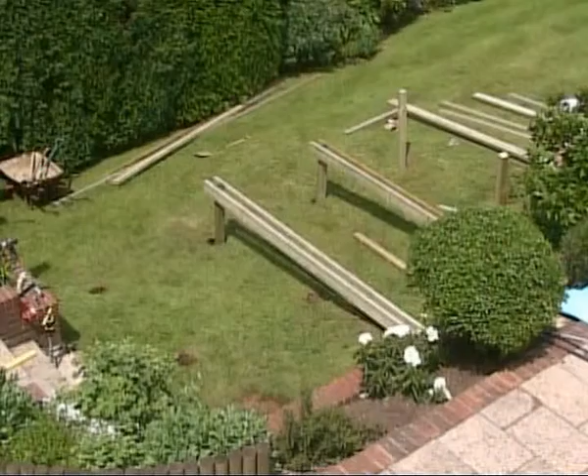This is it, our decking site. A sloping area hardly ever used by my family, but by the end of the week we will have transformed it into a fantastic new recreation facility, a place to relax and have fun. Right, let's get down to business.

Timber decking is as popular as ever for creating a versatile and beautiful extra living space in our homes. Decks provide a space to relax, an area to play, a place for dining outdoors, an extension to our living space. Wood is best. Timber is still our most adaptable and only truly renewable construction material. Properly protected, it provides the perfect long life, low maintenance and economical choice for our decking. Timber also has a natural beauty and warmth, making our deck look and feel attractive.

What is Tanalised E treated timber? Tanalised E treated timber provides us with an economical, versatile and long-lasting material for our decking project. It is pressure pre-treated with the latest generation wood preservative, manufactured and supplied by Arch Timber Protection. This provides total protection against wood decay and insect attack, together with a long and low maintenance service life. It can be used with confidence for both in and out of ground contact applications. And Tanalised E treated timber is used by leading timber companies to manufacture their decking components.

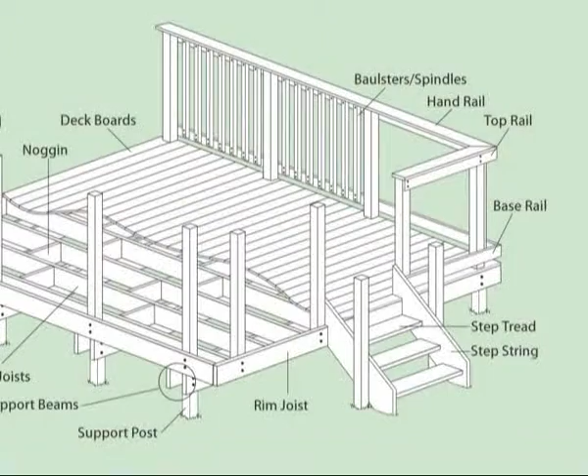Take care not to burn offcuts of treated timber. Do not burn treated timber offcuts in barbecues, cooking stoves or grates. Dispose of them safely as refuse. Wear goggles when pressure washing or scrubbing decking area with cleaners or restorers. During the project, keep children away from the work area until the job has been completed and tools have been safely stored away. A consumer information leaflet for Tanalised treated timber, which covers its general use, is available within the Documents section of this CD. Updated versions are always available from the Arch Timber Protection website, www.archtp.com.

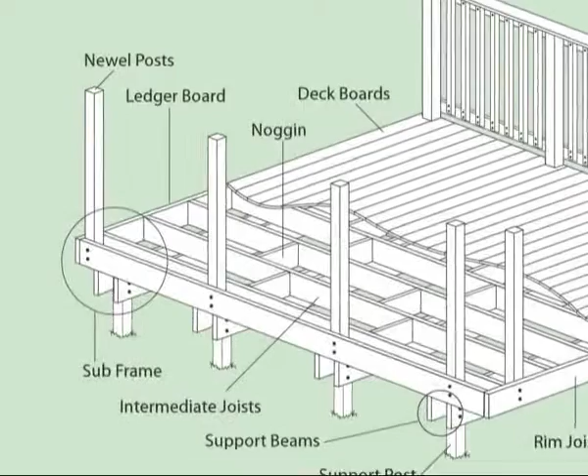This illustration highlights all the components that are used in deck construction and will be referred to in this presentation. Notice that the subframe is made of several components: support posts, support beams, joists, noggins, and Newel posts. One important thing to bear in mind is that the deck boards run in the same direction as the beams and across the joists.

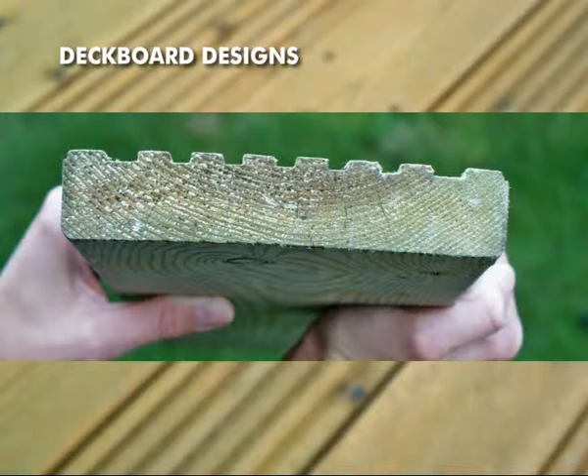Deckboard designs. Different decking suppliers offer varying deckboard designs to give you a wide variety of choice. Some boards have plain, smooth surfaces, and some offer a combination of smooth and profiled surfaces. The width and thickness of deckboards also varies. Generally, the narrower and thinner deckboard designs will require more supporting joists to support the boards within the deck design. Your choice of deckboard design will therefore have an influence on your subframe construction. This will be covered later in this presentation.

Newel posts and balusters. Decking suppliers will also offer a choice of Newel post, handrail and baluster or spindle designs. These can be traditional turned posts, handrails and spindles, or more contemporary straight posts, rails and balusters. Fixing methods for each are slightly different, but the basic principle remains the same. Newel posts and balusters, together with accompanying hand and base rails, form an attractive feature or barrier around your deck.

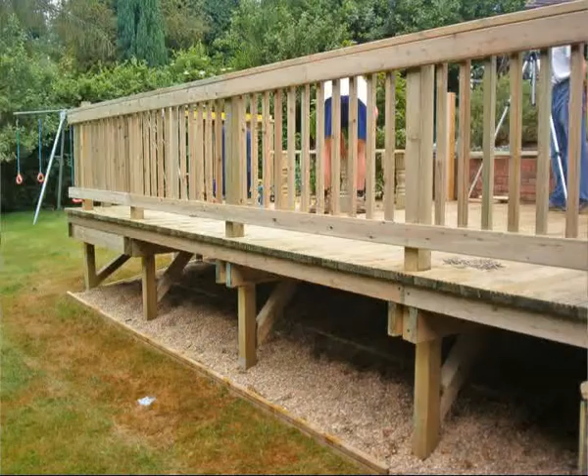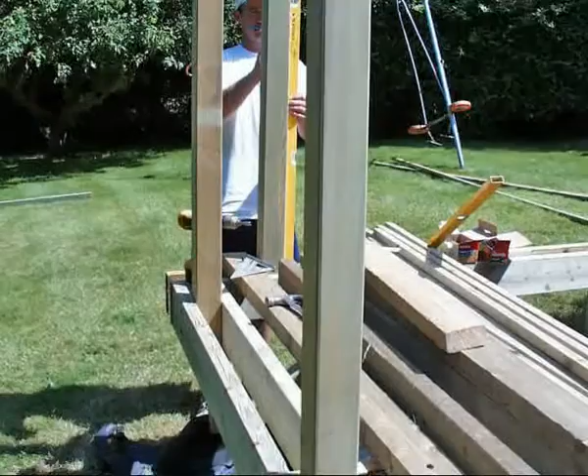Our deck design. Methods of deck construction vary greatly depending upon the components used and the design and size of the deck. For the purpose of this presentation, we will be constructing a double-beamed, single-level subframe on support posts over a sloping site. The deck will also have Newel posts, handrails and balusters, a combination of smooth and profiled deck boards, and will feature steps down into a garden area. Many of the construction methods we show you will be able to use or adapt for your deck design.

There are 6 basic stages to building our deck: planning and designing, preparation work, building the subframe, fitting handrails and balustrading, fitting deck boards, fitting steps. First of all, consult Decking and Lifestyle books or the Timber Decking Association website, www.tda.org.uk. They will provide you with lots of ideas for your deck.

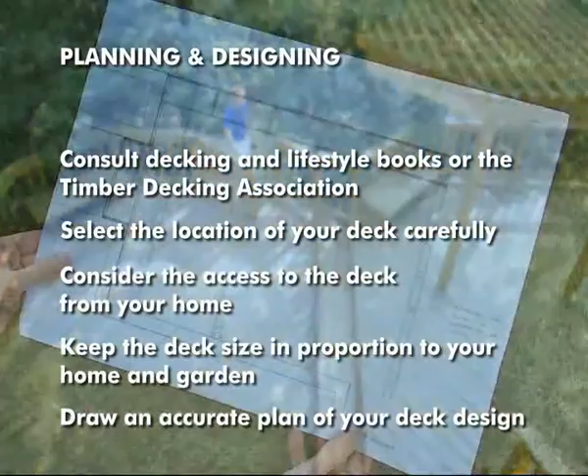Then select the location of your deck carefully, having regard for privacy and the weather, sun, shade, and the direction of the wind. Consider the access to the deck from your home, including safe and easy access for the disabled and for children. It is advisable to keep the deck size in proportion to your home and garden. Draw an accurate plan of your deck design. This will help in the construction process and will help you and your decking supplier to confirm the component quantities you will require.

Remember, if you are constructing your own deck, you will need good basic DIY skills to achieve the desired quality of construction, appearance and performance. For all but a simple low-level deck, you should satisfy yourself as to whether planning and building regulations apply. If unsure, always discuss your intentions with your local authority planning office, as well as your neighbours.

Consider the end use of your deck. You may need to beef up the design and build to commercial specifications for large groups of people, or if a hot tub is being designed into the deck. And be aware that building regulations require that any deck of more than 600 mm above ground level shall incorporate Newel posts, handrails and balusters for safety purposes.

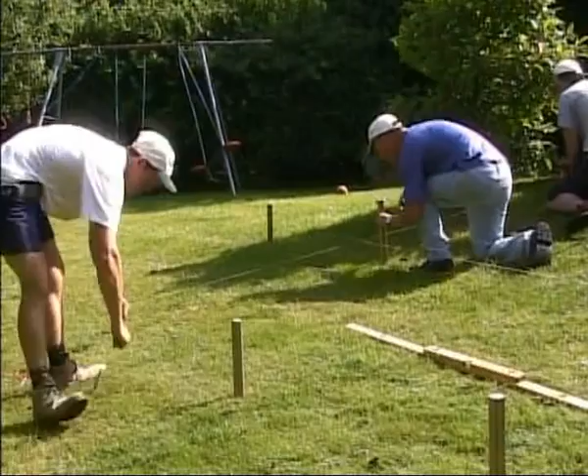Preparation work. Within the deck we are constructing, we will be utilising a low garden wall and steps from the patio area. We will also be incorporating an existing magnolia shrub as part of the deck design. Including features such as these helps to blend the finished deck into your existing garden environment. Once your design and planning work has been completed, using the deck plans, roughly work out your deck area and mark the site with timber stakes and string. This will confirm the size and position of the finished structure. It will also help confirm its scale to your home and garden and its relationship to other garden features.

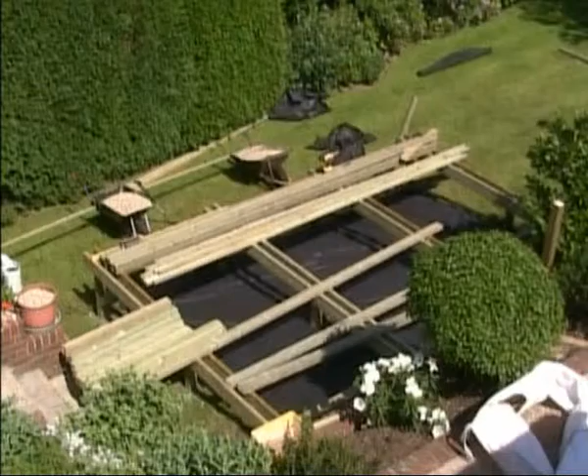Generally, the vegetation covering the site should be cleared. However, turf can be left in position so long as you're applying a weed membrane to the full site and covering the membrane with pea shingle. The pea shingle will cut out any light to the membrane and maintain its function. Rolls of membrane are available from your decking supplier. Pea shingle is available from your decking supplier or your local builder's merchant. On our decking project, because we are using support posts for the subframe, our membrane will be laid over the turf after the construction of the subframe.

Using a measure, accurately determine the position of the deck support posts from your deck plan. These posts will support a pair of beams, which will form the main structure of the deck subframe. Mark their positions using a timber stake. On our deck, we will be using 90mm by 90mm size posts. Check that the positions of the support posts are accurate and square to each other, and to other structures that will be surrounding the deck.

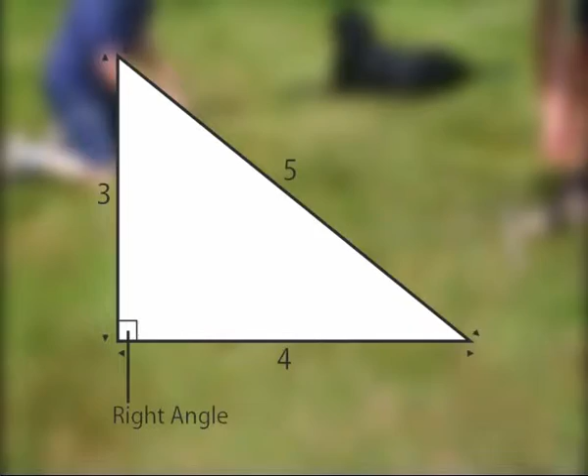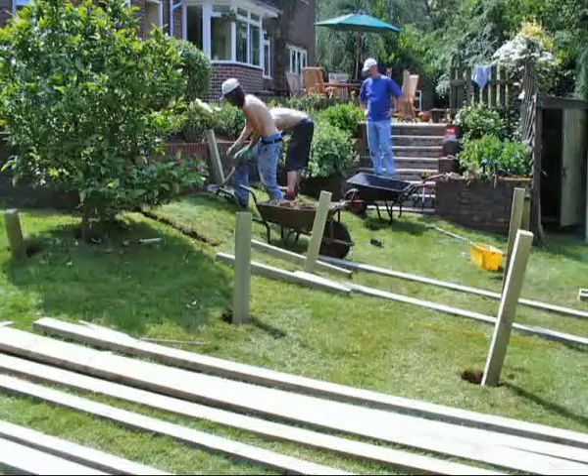A simple way of ensuring right angles between these post positions is to use the 3-4-5 triangulation ratio method, using timber stakes and string. Once you have accurately located the position of the support posts, use a narrow spade to dig a 600mm deep hole at each position. Each hole should be roughly 200mm across. Line the base of each hole with a 25mm layer of pea shingle. This will allow a firm, well-drained base for each support post.

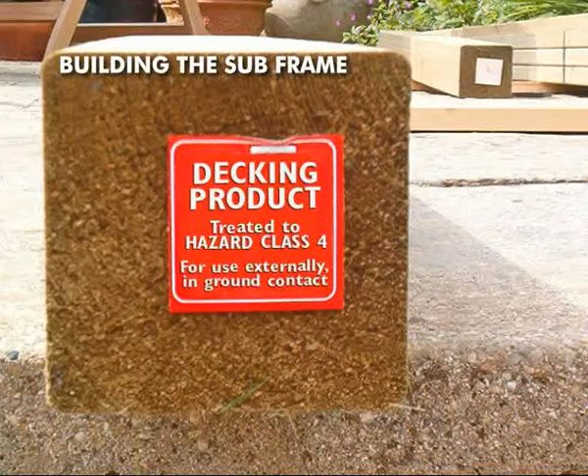Building the subframe. Support posts are different to ordinary Newel posts in that they must have been preservative pre-treated to a higher level of protection to allow for the post being used in ground contact. This is very important for the long-term performance of your deck, and you should check this fact with your decking supplier, making sure that any other ground contact timbers also have this level of protection.

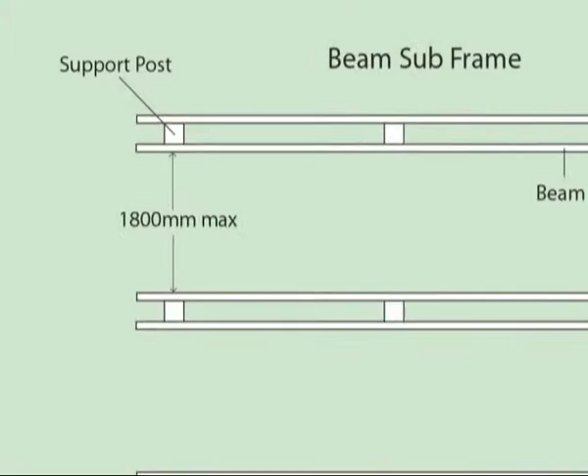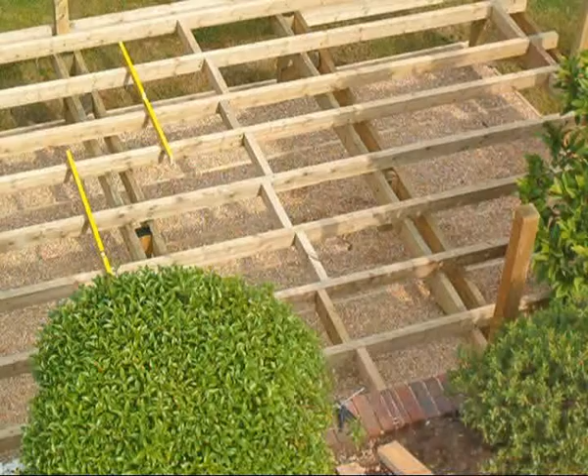On our deck design, there will be 4 beams. The distance between beams should be a maximum of 1800mm. However, depending upon the intended use of your deck, these beam distances may need to be significantly less to provide extra strength and stability. The position of the beams will be determined by the joist size, which in turn is determined by the unsupported distance they have to span.

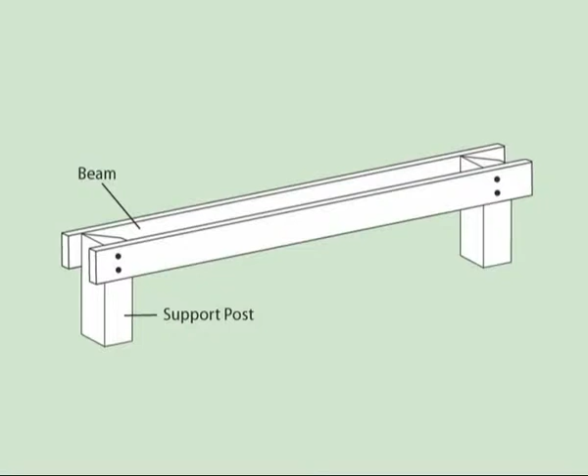Your decking supplier should be able to advise you here, or you can refer to the leaflet showing beam and joist span tables within the Documents section of this CD. Our beams are constructed using 150 by 47mm joists, fastened to either side of the support posts. We now need to cut the support posts to the required size.

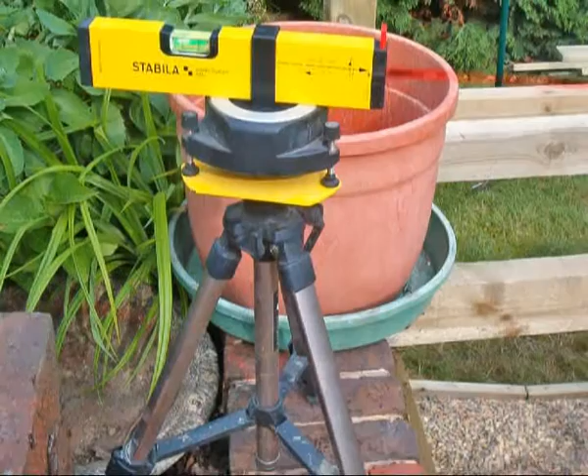If you have a level site, all your support posts will be of a similar length. Because we have a sloping site, the length of each post has to be determined. A useful tool for achieving a general measurement is a laser spirit level. From a fixed point on your deck site, a laser beam can be projected onto each support post held in position within its hole. The point can be marked and each post cut.

Alternatively, each support post can be concreted into position and then cut to size prior to attaching the beams. Here, the 3-4-5 triangulation method of creating a 90-degree angle will help ensure your post positions are square and accurate. When cutting the top of each support post, cut at a slight angle. This will allow rainwater to drain off the posts.

Use Ensele Brush-On End Grain Preservative to seal the cut made to the timber. It is best practice for the opposite end of the post, which will be in ground contact, to be left uncut. If it has been cut, this too should be brushed with Ensele.

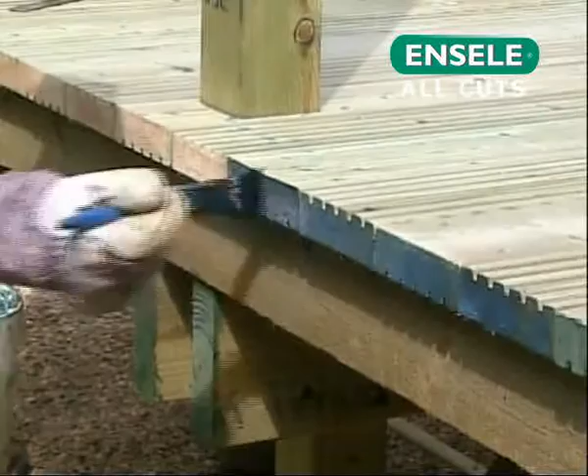Throughout your decking project, all cuts and notches made to the treated timber should be sealed with Ensele, available from your decking supplier. The use of Ensele forms part of the performance warranty of Tanalised treated timber. Therefore, it's very important to carry out this procedure. When applying Ensele end grain preservative, always follow the instructions on the can.

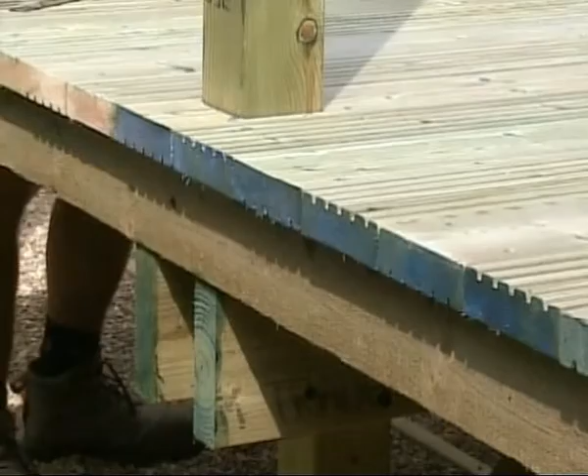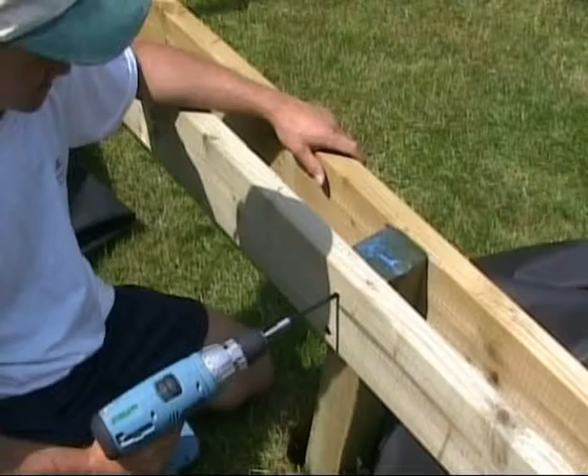The initial blue coloration of Ensele will quickly change after application to a pale green to blend in with the treated timber. A leaflet on the use of Ensele is also available within the Documents section of this CD. To construct our beams, we used 150 by 47mm joists, fastened to either side of your outer support posts. This fixing should be temporary at this stage and made with screws.

Position the beams, with the outer support posts attached, into the holes and check the beams are roughly level to each other using a long spirit level. Height adjustments can be made by either hammering down the support posts to drop the level or adding extra pea shingle under the posts to raise the level.

When constructing the deck, you should allow a slight fall in one direction, usually from back to front or to the side. This should be a minimum of 1 in 100, allowing adequate rainwater drainage on the finished deck. If you are using grooved deck boards, these should be laid in the direction of this fall to ensure water drainage. Intermediate support posts can now be temporarily fixed with screws at the centre of the beams.

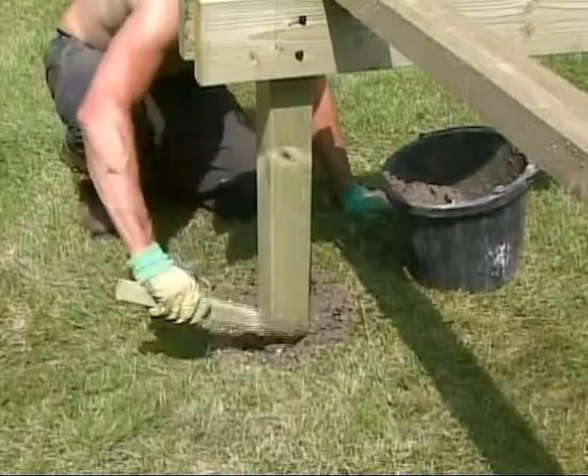Once a final check has been given to the level of all the beams in relation to each other, all the support posts can be concreted into position. Use a thick, dry mix of concrete and tamp the mixture down around the post. The finished level of the concrete should be slightly above ground level, with the surface bevelled away from the post to allow water runoff. These beam structures should now be left overnight, allowing the concrete to set.

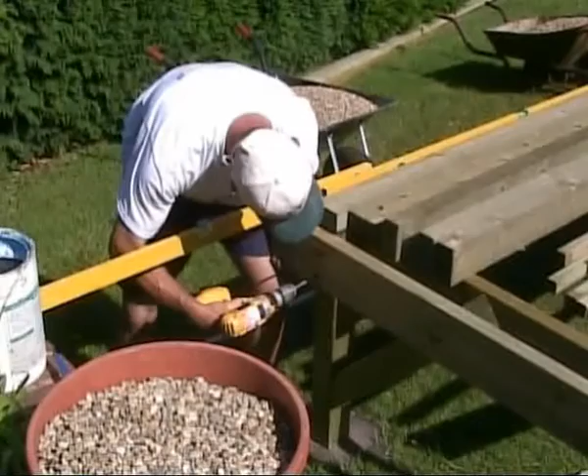The following day, again check the levels of the beam structures to each other, with the drainage gradient in mind. Adjustments can be made by unscrewing, raising or lowering to suit, and refixing the screws. These fixings of the beams to the support posts should now be made permanent using 2 ledger lock screws or coach bolts. To add extra strength to the subframe structure, angled corner bracings made from support post material can be screw fixed to the outer support posts and up into the beams.

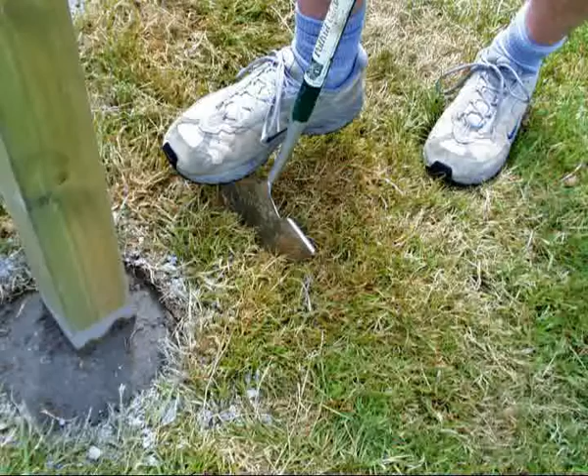Now that the support posts and beams are in position, we can continue to lay our membrane over the turf. Using an edging tool or spade, make an incision into the turf all around the outer edge of the deck area. Bear in mind that the position of this incision will be determined by the eventual position of your deck boards and fascia board vertically above the edge of your deck.

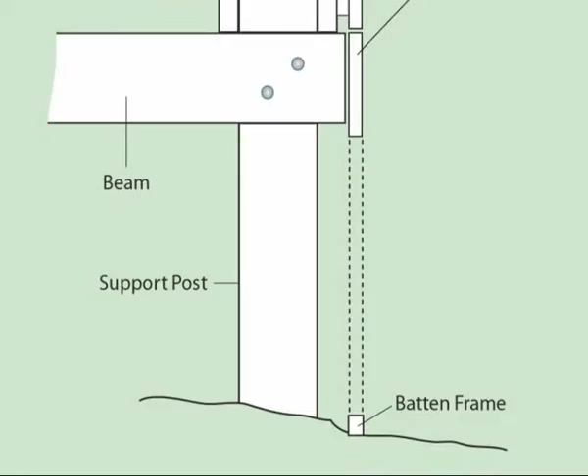Cut lengths of the membrane to suit, and with the edging tool or spade, push the outer edge of the membrane into the incision in the turf. Continue around all of your deck, laying and fixing the membrane. Ensure that the complete area under the subframe is covered with membrane. Make cuts to the membrane to go around support posts and any other structures or deck elements within the subframe area. Overlapping patches can be made if required, and fixed into position using metal staples.

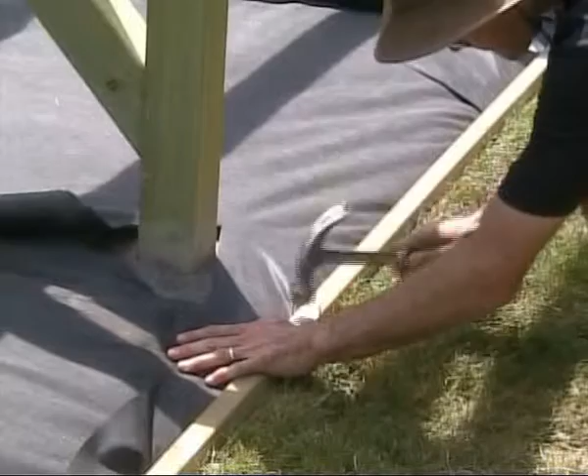Once the membrane is in position, use lengths of treated timber battens or baluster material to form a shallow frame around the subframe. This will give an edge for the subsequent covering of pea shingle to rest against on a sloping site. Fix the battens using metal staples. On sloping sites, intermediate battens within the subframe area may also be required to prevent the movement of the pea shingle

down the slope. Cover the whole area of the membrane with a 25 mm minimum depth of pea shingle. This will allow excellent drainage under your deck and will help keep the membrane in position and cut out any UV light, which can deteriorate the membrane material.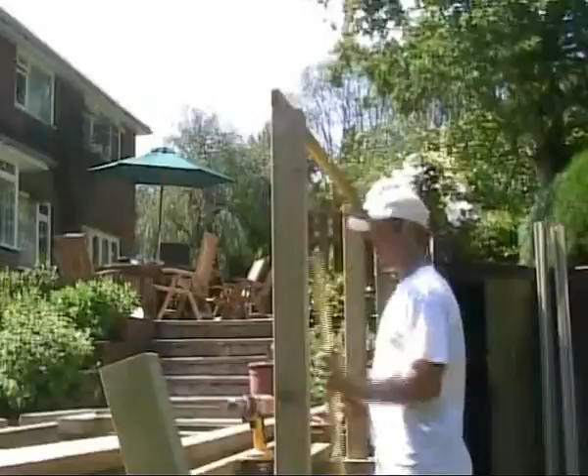Newel posts can now be fixed into position. These posts will provide the support for our handrail system around the deck. Cut the newel posts to the required length, allowing for the depth of the subsequent top rails, bottom rails and balusters that will make up the railing system. When fitted, a maximum of 100 mm gap should be allowed between the top of your deck boards and the bottom edge of the base rail of your railing system.

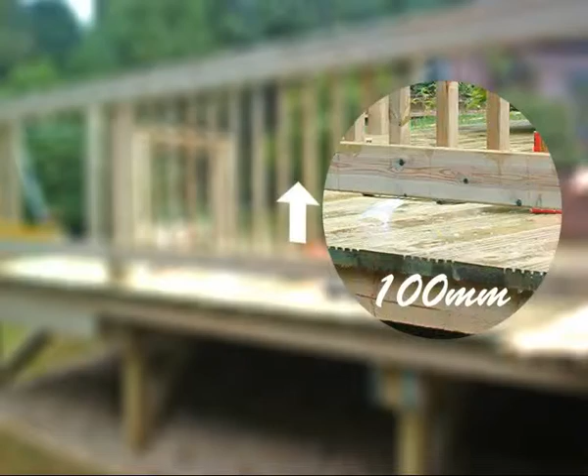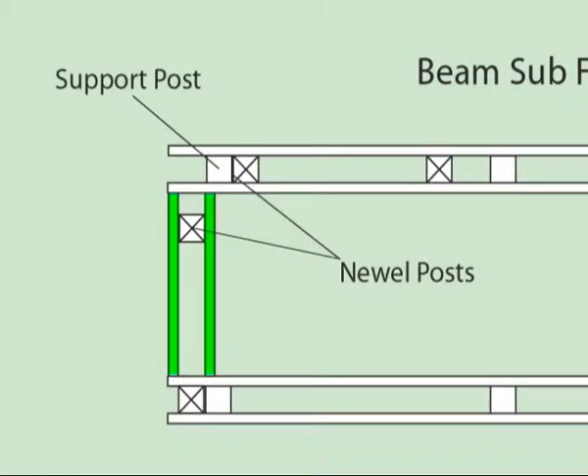The bottoms of the newel posts are fixed in at least 2 directions to the beams, using either LedgerLOK screws or coach bolts to provide a solid fixing. Once fixed in position, check that the newel posts are level. For the corner newels, extra joist material is fitted between the beams to provide increased support. On our deck, we also fitted an extra newel post into the subframe to accommodate our colonnade feature around the magnolia shrub.

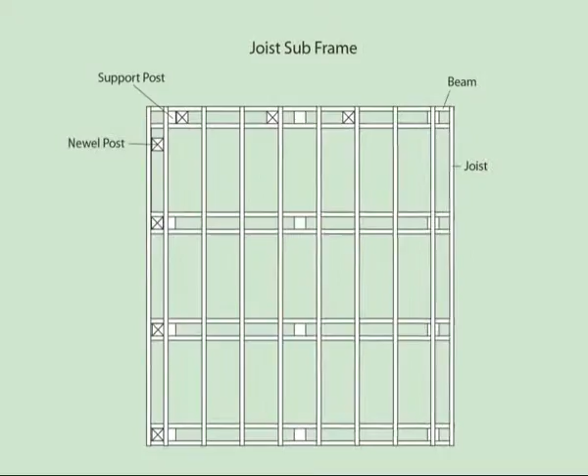Intermediate joists can now be fixed onto the beam structures using 100 mm screws or 100 mm high-quality galvanized nails, fixed at an angle down into the beams. Again, we used 150 by 47 mm size joists. The distance between each joist will be determined by the section of the deck boards you're using in your deck design. Wider, thicker deck boards can have wider joist spacing. Narrower, thinner deck boards will require closer joist spacing.

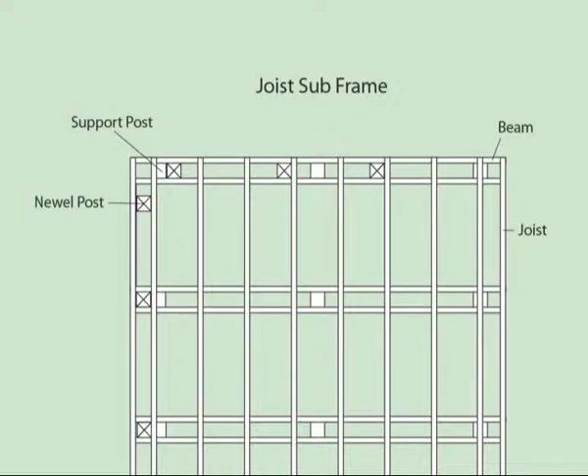Decking suppliers will give advice on joist spacing for their range of deck boards, or you can refer to the joist spacing leaflet supplied in the Documents section of this CD. Continue to fix the subsequent joists across the beams. To maintain a consistent width between joists, a short piece of timber cut to size is a useful device.

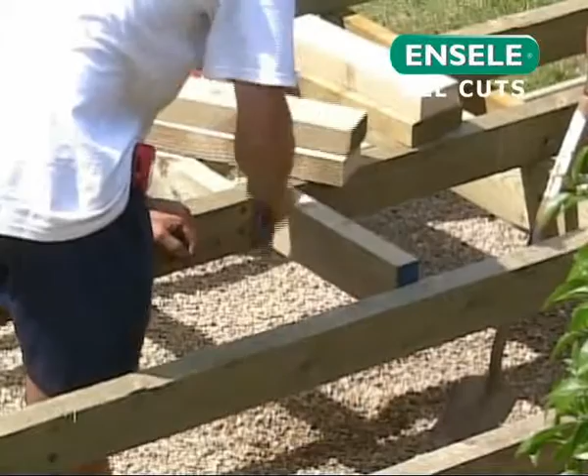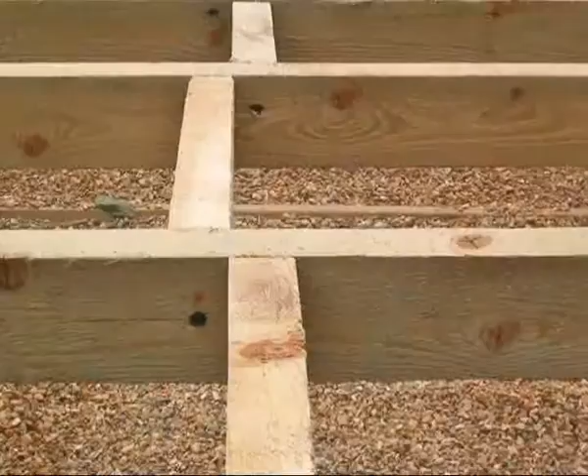Once all the joists are fixed, noggins should now be fitted throughout the subframe. These are short pieces of joist material that are fixed between the joists to provide extra rigidity to the whole of the subframe. Noggins can be fixed using screws or high-quality galvanized nails. We have also positioned noggins around the magnolia shrub to create a mini-frame that will provide support for the subsequent deck boards.

Using screws, joists can now be fitted to the outer edges of the beams. These are known as rim joists. These will provide an outer edge support for our deck boards. Because our deck design incorporates an existing wall and steps, a ledger board will be used to act as an extra beam to fix the joists to.

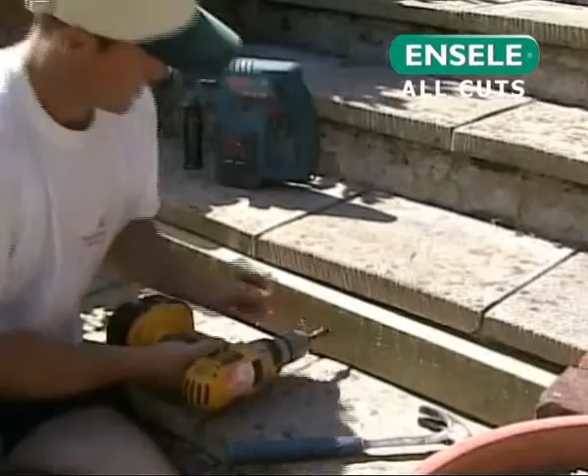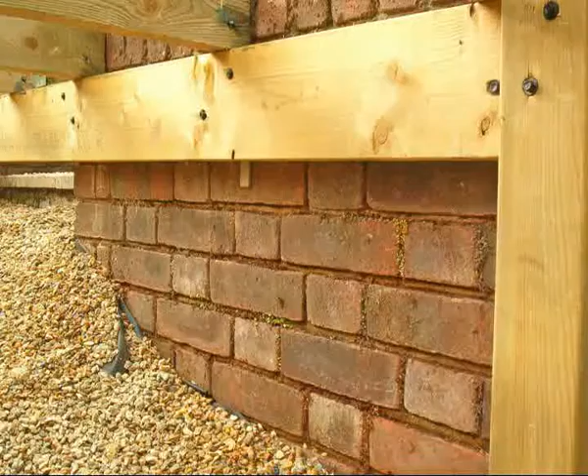Ledger boards, cut from joist material, are screw-fixed to the wall and steps along their lengths. These boards should be packed away from the wall and steps by at least 10 mm, using either several washers around the screw fixing or galvanized bars. This allows adequate water drainage.

If your deck is to be fixed directly to your house, a ledger board should be used and fixed in a similar way. However, the damp-proof course of the dwelling should never be compromised or bridged, which is why you often see advice to install decks well below DPC level, particularly where DIY installation is involved. But by following the details and procedures shown on the illustration, decking can still be installed to be level with an existing patio or French doors.

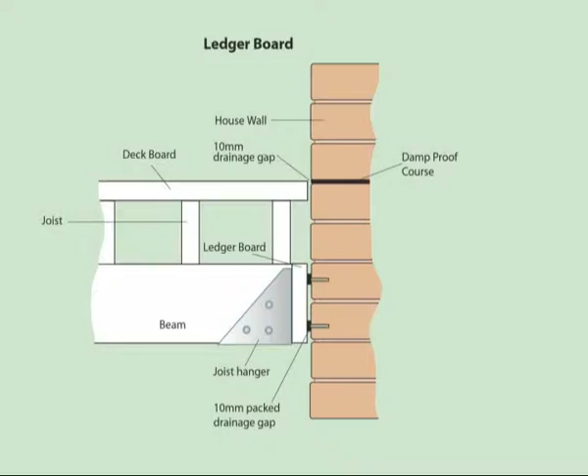We can now fix extra joists from the main subframe to the ledger boards to create our small subframe in the step area. Joist hangers and corner brackets have been used to fix and support the joists to the ledger boards. Our subframe is now complete.

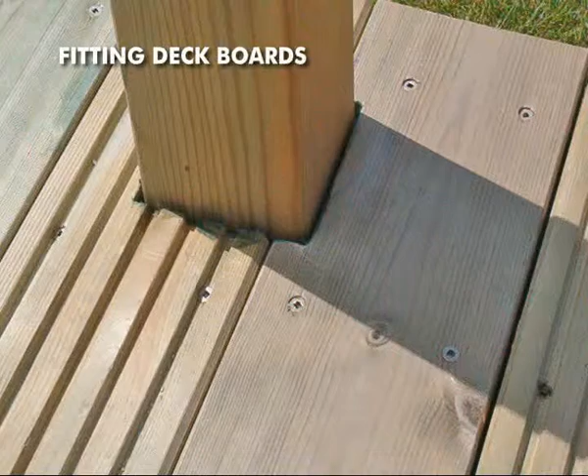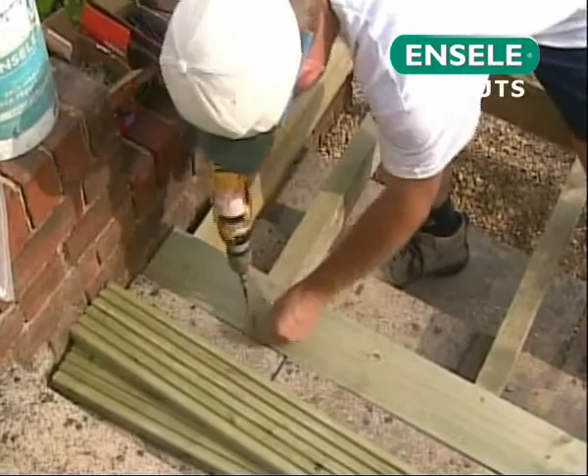Fitting deck boards. We can now start to lay our deck boards. On our deck design, we will be using alternate smooth and grooved deck boards to create our required pattern. We have fixed the deck boards down the gradient fall, ensuring rainwater can drain freely along the grooves or the smooth profile. Measure the required length of your first deck board and cut to size. Remember to end seal the cuts on each deck board.

Using 2 deck screws on each supporting joist, accurately fasten your first board 25 mm in from either side, lining up the screw positions for an aesthetically pleasing finish. Screws should be 2.5 times the depth of the deck board. We used 75 mm screws for our 33 mm thick deck boards.

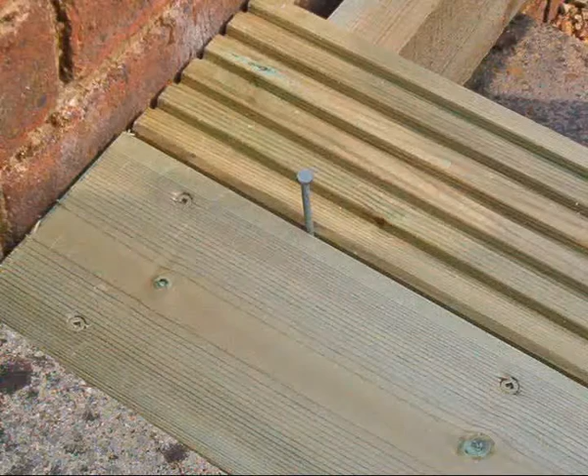Now position and fix your next boards, leaving a 6 mm gap between each board. A good tip here is to use a 6 mm gauge nail or screw to provide a consistent and precise gap along the length of the board. Because timber is a natural material, this gap between the deck boards allows for initial shrinkage and any subsequent expansion of the boards, together with providing excellent drainage on the deck.

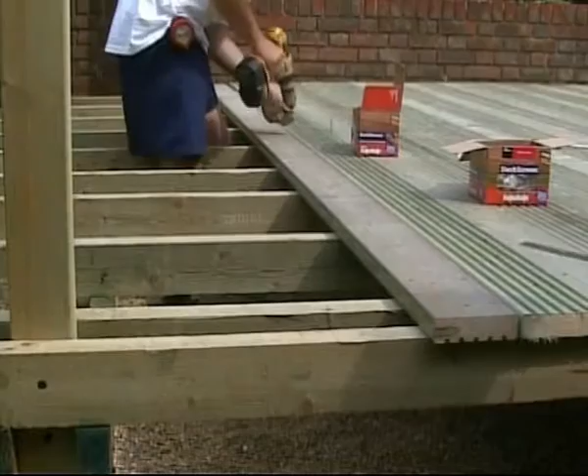Continue along your deck, cutting each deck board to size and fixing with 2 deck screws at every supporting joist along its length. If the deck board is to go around a newel post on the edge of the deck, measure the notching required, again allowing a 6 mm gap between the deck board and the newel post. Carefully cut the notch and fix the board into position.

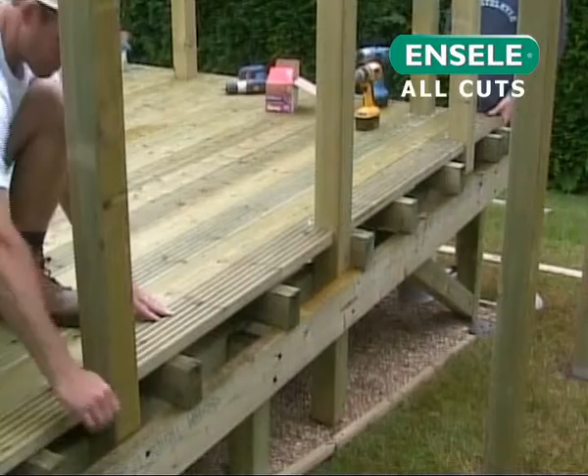When fixing the very end of each deck board, it is necessary to pre-drill the 2 screw holes to help prevent the timber from splitting. When you get to the fitting of your final deck board, you may have to make several notches to go around the newel posts positioned along the length of the board. Remember to end seal all the notches.

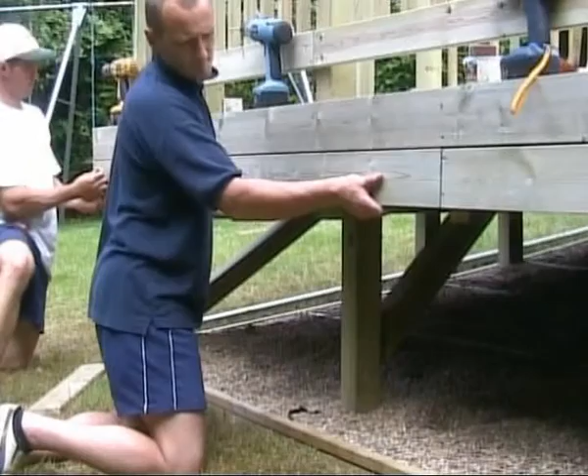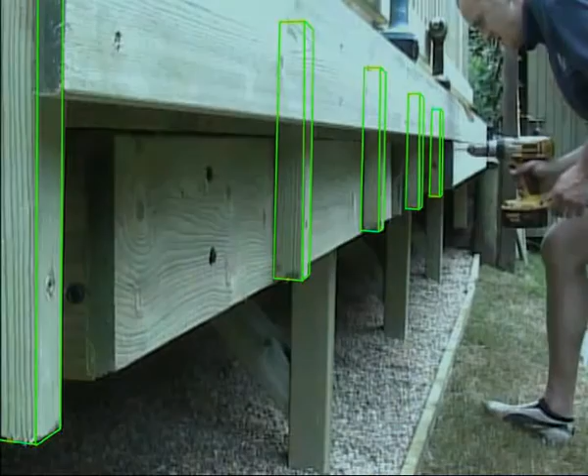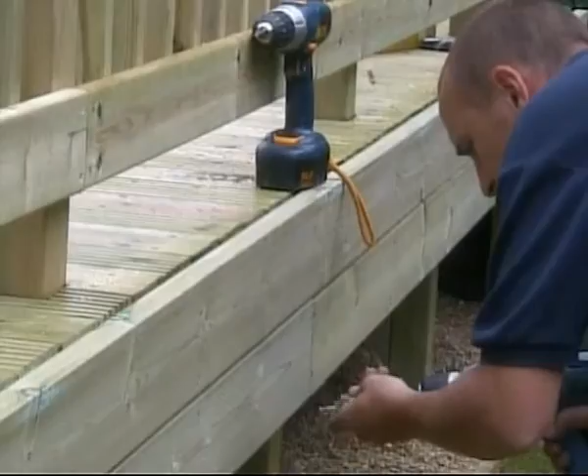To provide a neat finish around our deck, lengths of deck board can be used to create a fascia. These fascias hide the cut ends of the deck boards, as well as the ends of the beams. Spacers made from short lengths of baluster material will be required along the length of the outer faces of the subframe to attach the fascia boards and provide support. The fascia boards are screw-fixed to these spacers and mitered at the corner joints. The spacers also allow a drainage gap between the ends of the deck boards and the fascias.

We have incorporated our existing magnolia shrub into our deck design, and as with the cutting required to go around our newel posts, each deck board should be carefully cut to shape with a jigsaw before fixing in position around the shrub.

Fitting handrails and balustrading. Now that our deck boards are in position, we can start to look at the handrails and balusters that will provide a feature around the edge of our deck. First of all, a top rail is cut and fixed to the newel post so that the top edge of the rail is level with the top of the posts. The rail can be fixed to either the inside or the outside of the posts, whichever is preferred from a visual point of view. However, fixing to the insides of the posts is advisable if you require improved strength to the railing system.

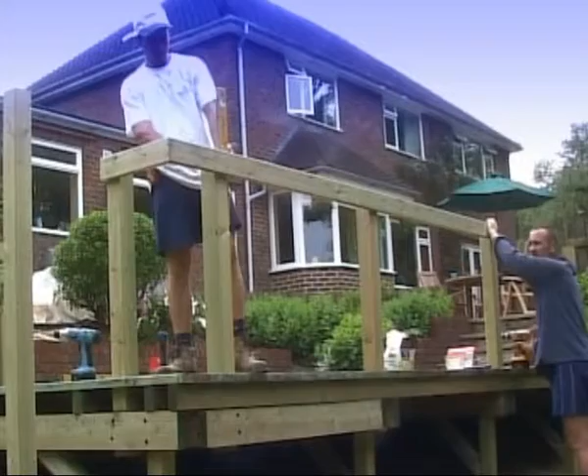Fix the rail with 2 screws to each post, making sure that your joints of rail are calculated to meet in the centre of the newel posts. Where the rails meet at the corner of the deck, mitre the joint for a professional finish. Further strength can be added to this mitre joint with 2 screws positioned horizontally.

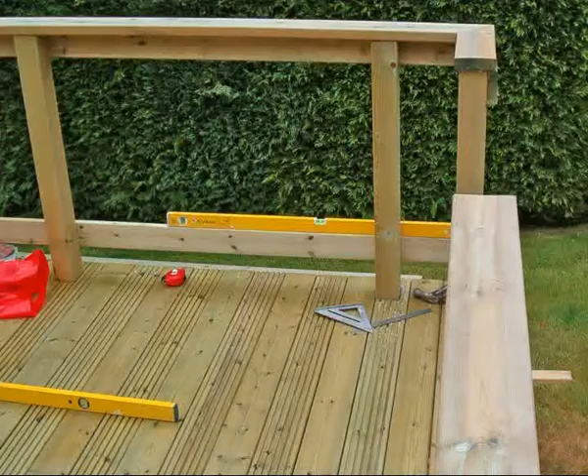Base rails can now be fitted to the posts around the deck in a similar way. Remember that the bottom of the base rail should be no more than 100 mm above the top of your deck boards. A wider top handrail can now be fitted on top of the newel posts. The handrail sits squarely on top of each newel post and can be fixed using a metal corner bracket to the underside of the handrail and the inside face of the newel post.

Make sure the screws used with the bracket are not too long to come through the top face of the handrail. Alternatively, the fixing can be made by screwing through the top of the handrail directly into the newel post surface. Once again, where the handrails meet at the corners of the deck, use a mitre joint for a neat finish. Balusters can now be fitted on the inside of the top rail and the base rail.

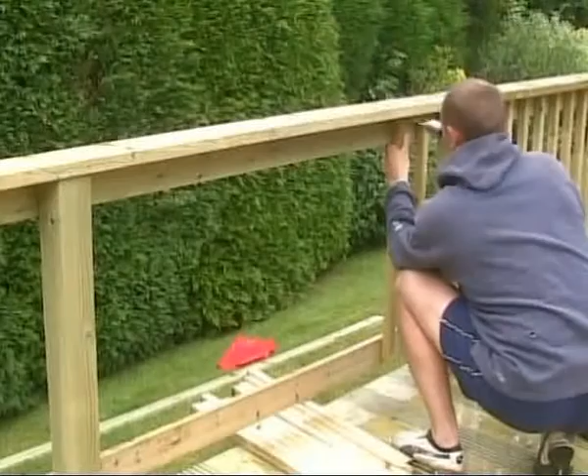Cut balusters matching the distance between the top edge of the top rail and the bottom edge of the base rail, less 10 mm at their base. The bottom of each baluster should also be given a chamfered cut for a professional finish. Balusters should be fixed with intermediate gaps of no more than 100 mm.

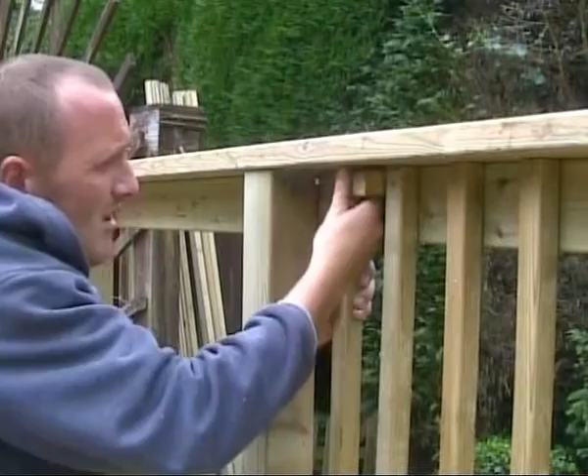You will need to work out the number of balusters for each section between the newel posts and their exact spacing to provide a consistent design. Once you've calculated this spacing distance, cut pieces of timber to use as a consistent spacer guide. Screw fix each baluster into the top and base rails using 2 screws in each fixing. Pre-drill the screw holes to help prevent the timber from splitting.

Some decking suppliers offer specialist products in their range to allow unique features to be designed into your deck. On our deck, we are utilising short columns to provide a lower level railing system to make a feature of our existing magnolia shrub and allow for its continued growth. The columns are first turned upside down, positioned at the required distance apart, and a section of the rail is screw fixed to each column, with 4 screws, 1 in each corner.

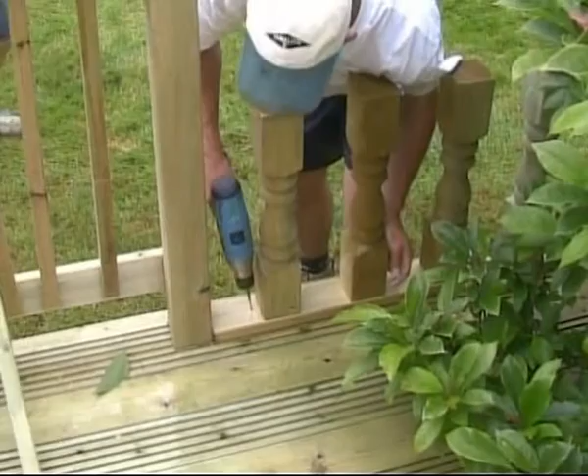As we are creating an outer corner to our deck, the rail section is then mitre joined across the last column to a second run of columns. The mitre joint is again strengthened with horizontal screws pulling the joint together. This jointed section is now turned the correct way up and screw fixed in position on the deck boards with the ends of the rails meeting the newel posts. Corner brackets are used at the newel posts to provide a neat and solid fixing.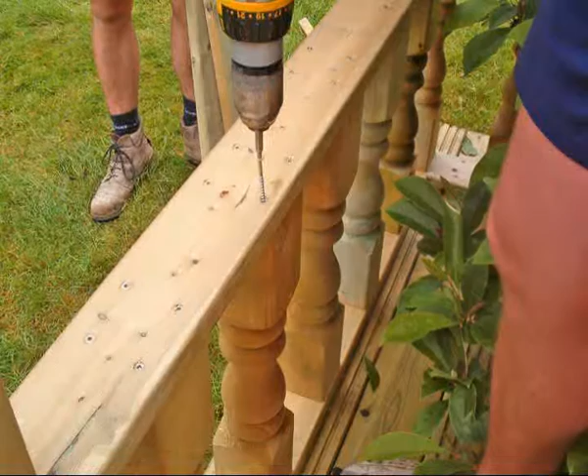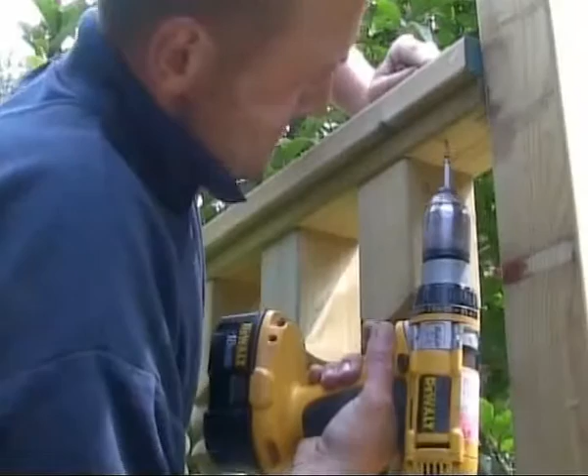The freestanding newel post, already built into the subframe, is carefully cut to size to match the height of the columns. Sections of top rail are cut to fit over the top of the columns with a mitre joint at the corner. The top rail is screw fixed down onto each column with a screw at each corner. Finally, sections of wider handrail are cut and screw fixed from below through the top rail. Each end of the handrail section, where it meets or overlaps the newel post, is given a chamfered angled finish with a chisel for a professional touch.

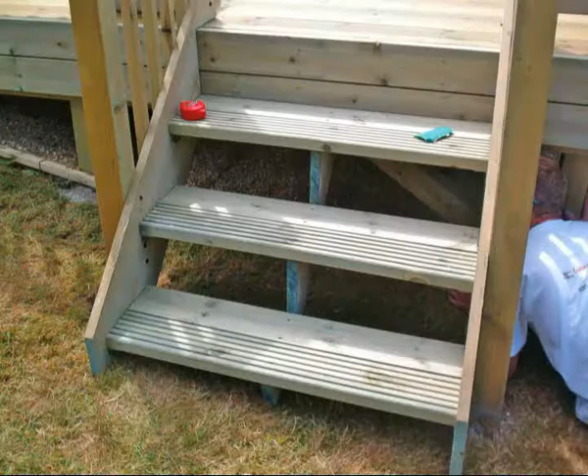Fitting steps. Steps for your deck are made up from 2 main components, strings and treads. Some decking suppliers offer strings pre-cut to the number of steps required, and treads manufactured to suit the depth of each string that simply require cutting to length. However, on our deck, we will be preparing our own strings and producing the treads from our deckboard timbers.

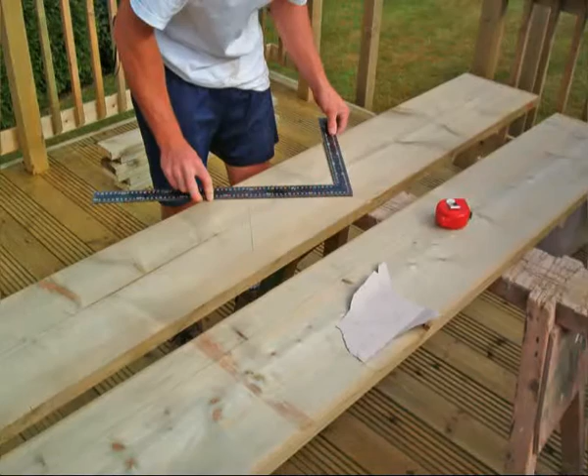In planning our deck, we have already positioned and cemented into the ground 2 newel posts, which will form the bottom posts for our steps. These are positioned equidistant and parallel to the newel posts that form the step opening within our railing system around the deck. On our 2 string boards, we mark out the position of the number of steps required using a set square and straight edge.

Calculate and cut the top of the string boards to meet the top of the deck and top newel posts. Similarly, calculate and cut the base of the string boards at an angle to meet just above the ground and the bottom newel posts. Offer the strings up to the edge of the deck between the inner faces of the newel posts to ensure our calculations have been correct.

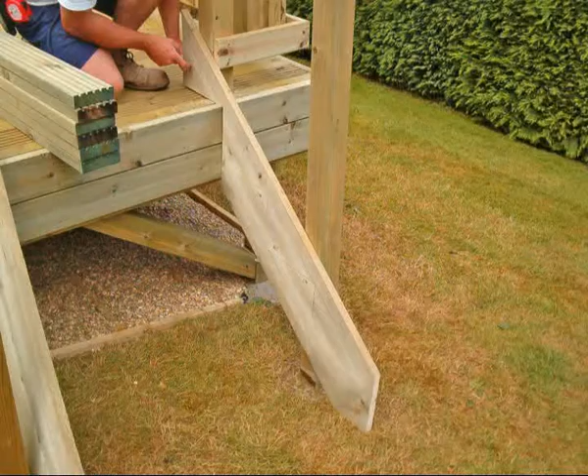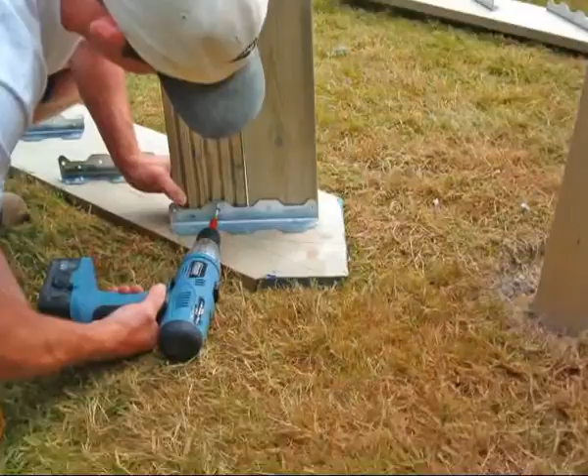Metal tread brackets can now be fixed to the inner faces of the strings. These will support the deck boards that make up the treads. Lay the strings down and fix the deck boards that make up the treads for your lower steps to the string brackets. This needs to be done at this stage, as once the steps are fixed in position on the face of the deck, accessibility for fixing the lower steps will be very limited.

Secure the 2 strings to the top and bottom newel posts using LedgerLok screws or coach bolts. Fix your top treads into the string brackets from underneath. If required, a central string to support the treads can now be cut to shape and added to the back of the steps to provide extra support and rigidity to the structure.

Added strength can now be given to the treads by horizontal screwing into each tread through the side of the strings. With a tape measure and straight edge, measure and mark the angled cut required to the bottom newel posts to be parallel with the strings. With a handsaw, carefully make these cuts.

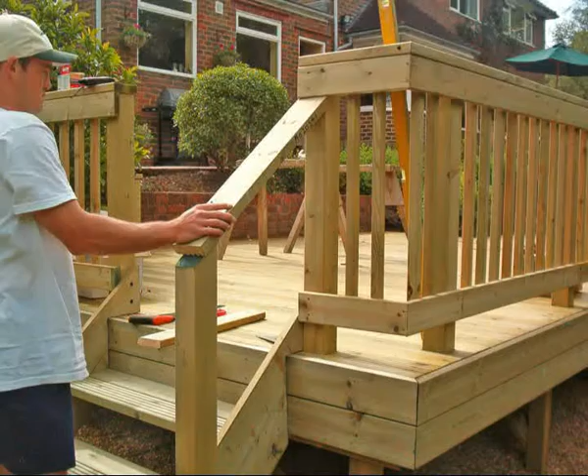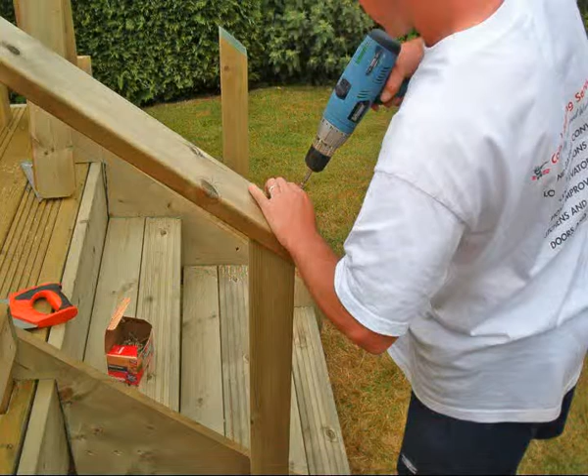Offer up a section of handrail to calculate the required length to overlap the bottom newel post and the angled cut required to fix to the top newel post. Once cut, fix the handrails in position with diagonal screwing into the top newel post and vertically into the bottom newel post. At the top, pre-drill the screw holes to help prevent splitting of the timber. Chamfer the corners of the handrail at the top and the bottom.

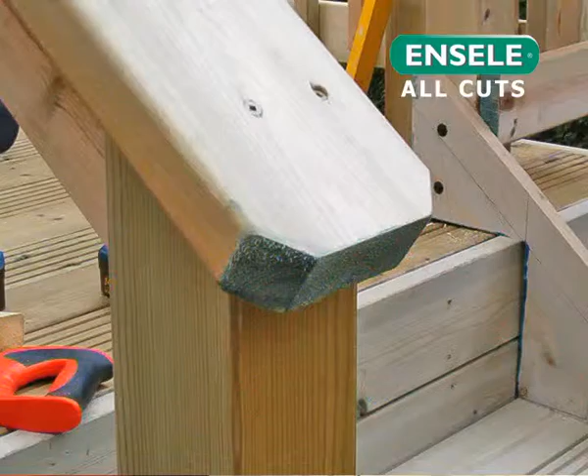Top rails now need measuring, cutting and fixing underneath the handrails. These top rails, together with the inside face of the strings, will provide a fixing surface for balusters to match the rest of the deck railing system. The top rail is fixed to the handrail with screws through the top face of the handrail.

Cut the top of the balusters with an angle required to fit the angle of the handrail. Chamfer cut the base of the baluster to match the other balusters on the deck. Pre-drill the screw holes in the top and bottom as previous. Fix with 2 screws at the top and bottom of each baluster.

Finishing touches. Some decking suppliers offer trellis components, which can be fitted around the deck base to provide a barrier to any debris accumulating under the deck. Trellis panels can be cut to the required depth and fixed in position with a simple capping system.

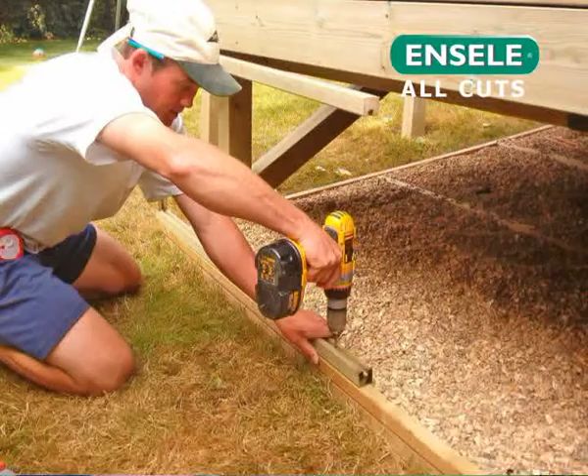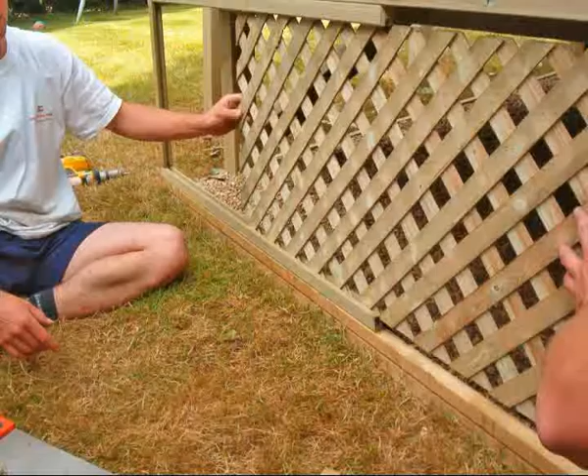Firstly, lengths of capping rail are fixed to the underneath of the deck fascia boards and on top of the battening that forms the frame around the membrane of the deck. A vertical capping rail is also fixed at the corner of the deck. Pre-cut trellis panel is now slid into position within the grooves of the capping rails.

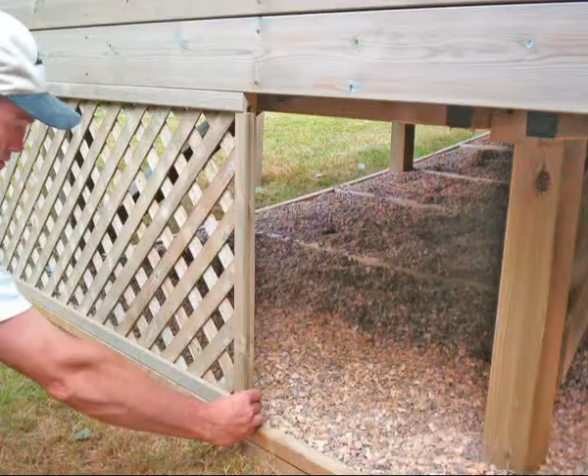A joining rail completes the section of trellis with a free outer groove to continue the process along the length of the deck. However, my family has decided to leave the base of the deck open. It is an area that can be utilised for storage of garden equipment, or simply as a cool, shady resting place for me on those hot summer afternoons.

Just to finish off, a few tips on getting the best performance from your deck and keeping it looking at its best. Some decking suppliers provide an extra built-in water repellent protection within the Tanalised preservative treatment of their timbers. This usually shows with a water-beading effect on the timber surface. This will help to minimise splitting of the timber.

Brush-on water repellent products, such as Hickson Decor Wax Coat, are also available to maintain and refresh this protection, or to add an initial protection to standard preservative-treated timbers. You should always keep your deck clean, sweeping it regularly to remove dirt and leaves. Pressure washing can also help. A wide range of deck cleaners is also available from decking suppliers and DIY stores.

For timber steps and decking timbers around ponds, clear aggregate brush-on products such as Hickson Decor Anti-Slip will help provide sure footing in wet weather. Should you wish to add colour to your deck, again there is a wide range of decking stains available, either through your decking supplier or from your local DIY store. Hickson Decor Wood Oil is just one example.